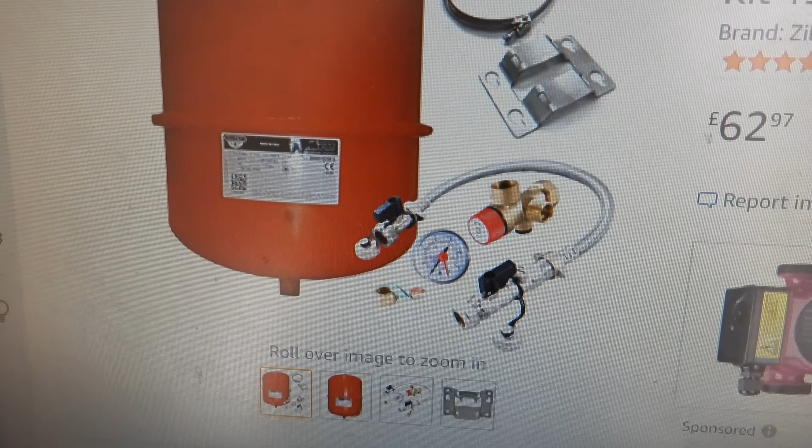But there is a way you could get rid of that roof tank, and it's by using one of these kits that I'm going to show you here. And this is the way you could do it. Now I hear you say, how easy is it to fit? Well, certainly not for the faint-hearted. You need to know a little bit of plumbing, I'm afraid, to actually fit this thing in your airing cupboard.

This little kit does come with a bracket to hang it on, so it could kind of go against the back wall. But handily, as I say before, most of the pipes go up through your airing cupboard. I'll show you a little bit more in a very kind of rough, easy drawing I've done in a second. And then you'll pressurise it just like a combi.

So it's got good points and bad points though, don't forget, because if, for instance, you've got an old system, you may have pipes going under the floor and you may have had a little leak under the floor forever, never known about it, because the little header tank, the F&E, would constantly be just topping it up slightly. You probably would never know.

And once of course you pressurise it and it becomes like a combi, any leaks are highlighted fairly quickly because the pressure gauge will drop away. Okay, and once it drops, that really is it. You'll find your stuff running into all sorts of trouble, as there won't be enough water in the pipes. It will start dropping the level down and down, and rads will stop working and so forth. So that's just one bad point about it.

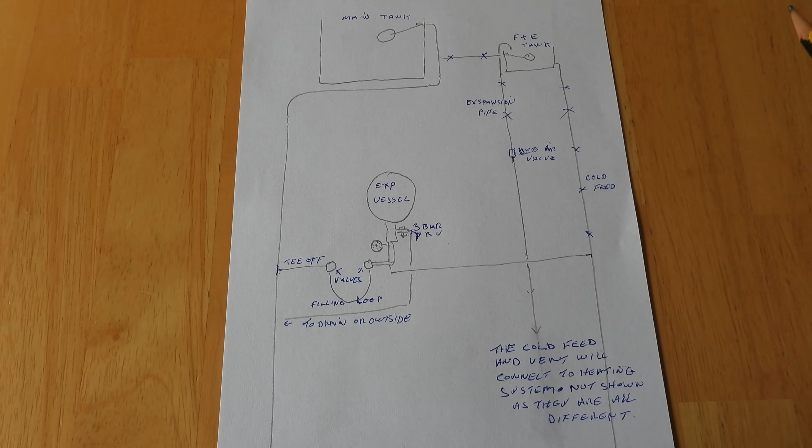Here then, one Acme drawing of ours. So this is kind of a view of an airing cupboard in a sort of rough way. We usually have the hot water cylinder down the bottom there. I'm not going to draw that because it's going to confuse the picture. I'm trying to make it as simple as possible. So we usually have the water main coming up in the airing cupboard. It goes up and it goes round to the main roof tank.

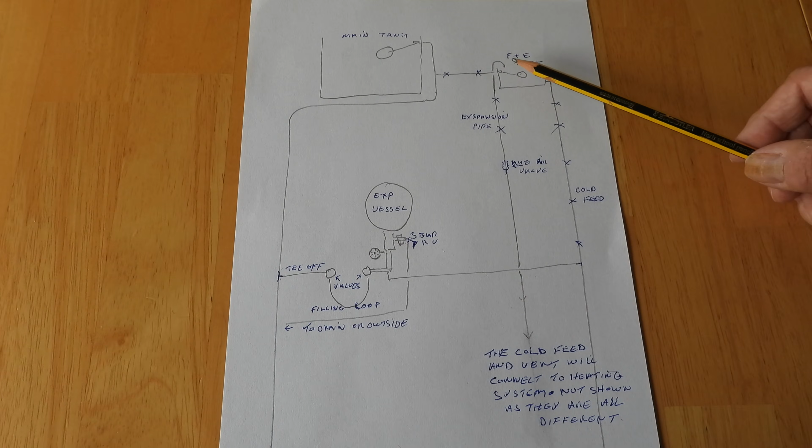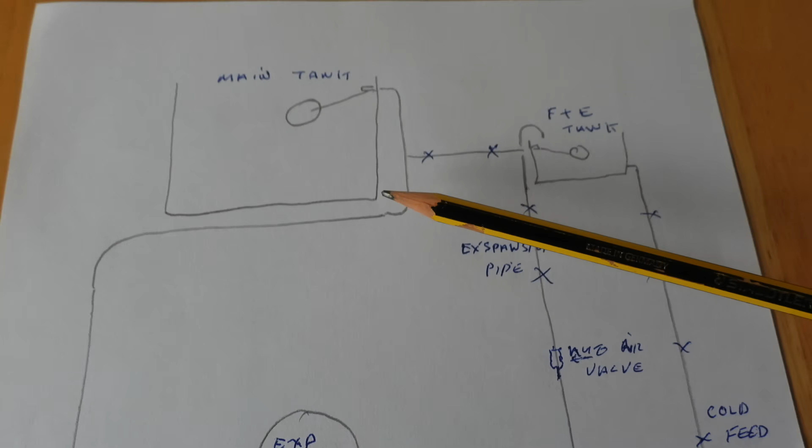It tees off somewhere to the little F&E tank, and this is the one we want to get rid of. So where I put the crosses is where we're going to get rid of the pipe. So basically you can start by turning the main off, and while you're draining the central heating out, you can actually get on with this part. Cut the main through. You can either put a blank there, or you can just join this back up together. So now instead of going to the F&E tank, it goes straight up into the main roof tank.

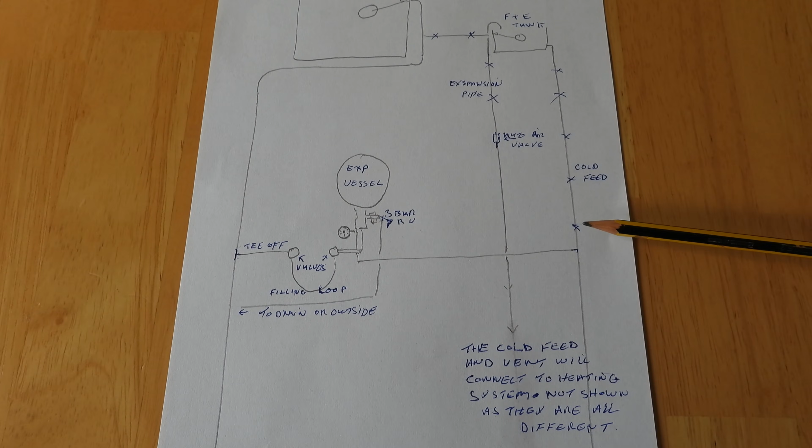This is now cut off from supply. Okay, the next thing we're going to do, assuming now the central heating is drained, you've got a feed pipe here, comes down here, we call it the cold feed, and this can now be cut. So what we're going to do here, where the X's are, that can all come out into the airing cupboard and cut it right down, because we're going to bring it right down level with our feed when we come across with the expansion vessel pipe, so it's easy to connect onto.

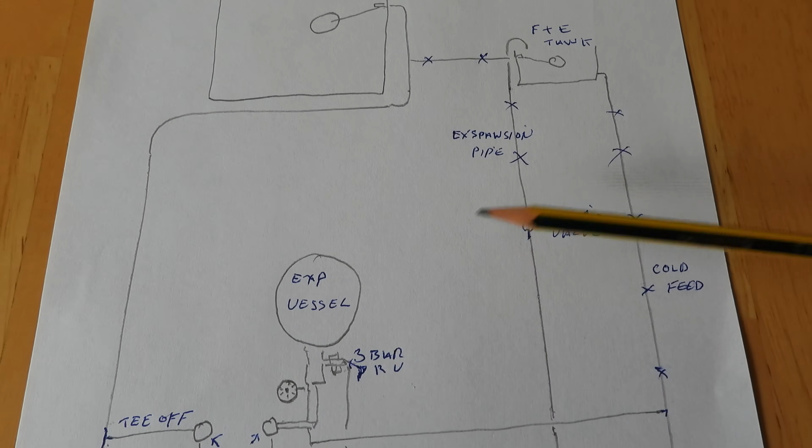So basically all this pipe is gone, can be ripped out. The expansion pipe also now can come out, but not as far down this time. I'm going to cut it higher up so that it's just a bit above the expansion vessel, because what we're going to do is put an automatic air valve in there so that any air is expelled out of the system, automatically done for you. But that bit of pipe with the X's in it can come out.

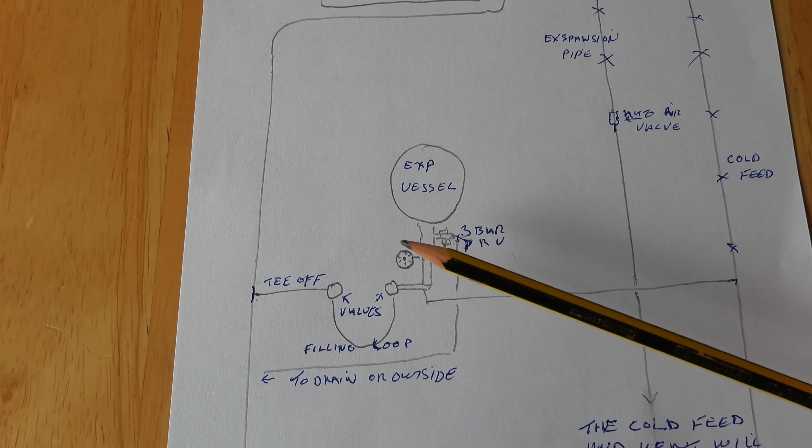So let's look at the expansion vessel thing itself now. Basically then we're going to tee off the main. Okay, we'll have two valves. They're the filler valves, and that's the filling loop. And that looks like two eyes and a face.

Well, not intentional really. Anyway, and then we're going to come across here and we go up into our vessel. There'll be a gauge, okay, on the side. I'm not going to go into all the details of how they fit, but it's very simple when you get the kit. There'll be a pressure gauge there, a bit like a combi, exactly the same. There will be a 3-bar relief valve here and the vessel.

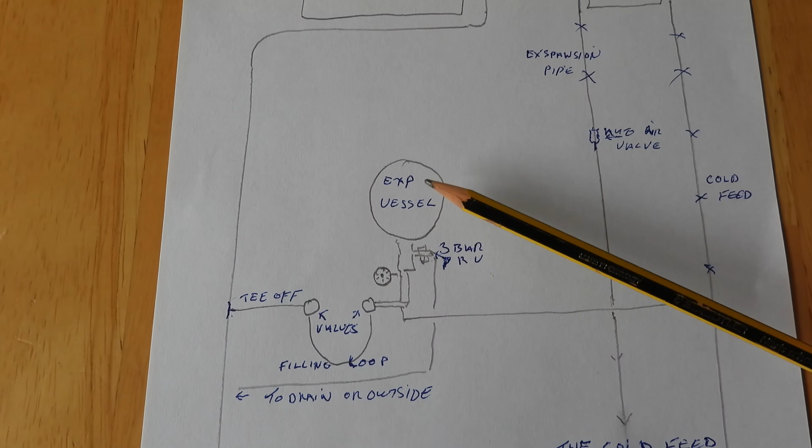The 3-bar relief valve is in case you over pressurize the system. If you do that, this 3-bar valve will release and allow the excess pressure to go down outside or wherever you are running that pipe, whether it's to a drain, into whatever you can find. Anyway, basically most people run them outside. So that's what that's about. Actually, that's probably the hard little bit extra to do.

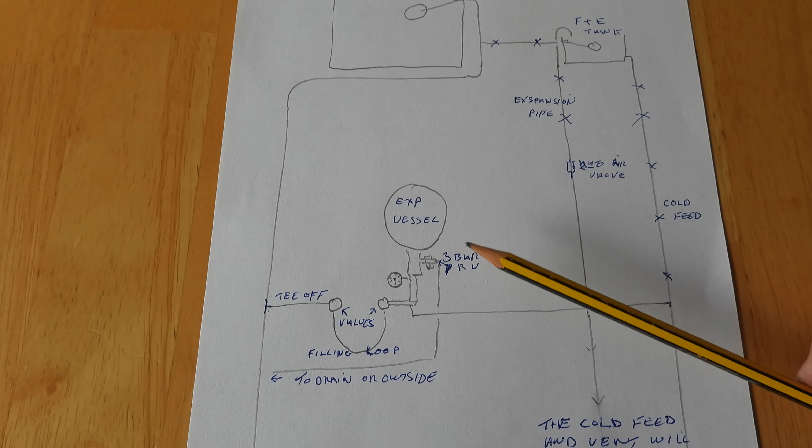Other than that, once we're talking about getting this thing connected, we're then going with the pipe, bringing it across here, and what we're going to do is we're going to connect it onto the cold feed. So when we turn the valves on, the thing pressurizes and the cold feed pushes down and fills all the radiators up again. Alright, so it's fairly simple, and basically that's it.

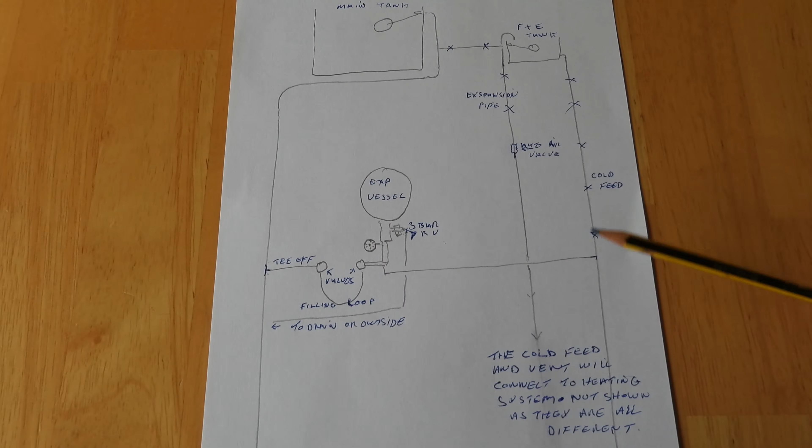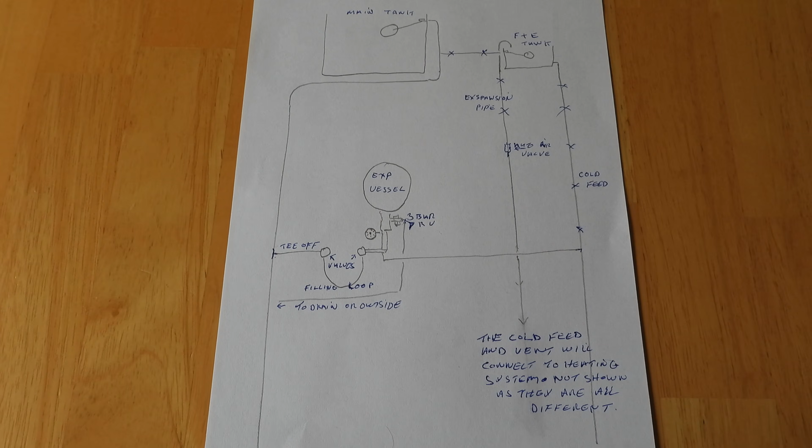I mean, I've put it about the cold feed and vent. They connect to heating systems all in different ways because they're all different, which is why I put that down and not draw on the cylinder or all the finer details, because some cold feeds go right down to the boiler, some go halfway down, and I've decided best to leave that out because it's a bit different for everybody. So it's a job not for the faint-hearted, like I said. It is fairly complex but doable, so not too bad.

As I said earlier, probably best to get a plumber in to do this job for you. You need to know what you're doing as regards where you're going to get those pipes cut and where you're going to join the actual expansion vessel and so forth, especially if you're not familiar with it enough. So if you think it's worth it, the actual kit is £60 odd, very cheap. But obviously it's got to be fitted with fittings and stuff, plus any actual labour time.

But if that's what you fancy going for, no little roof tank, no air problems and such, then do go ahead and get it priced up. And if you are up to it, of course, have a go yourself, but only if you are confident enough. Okay, that's it though, just been asked about that one.